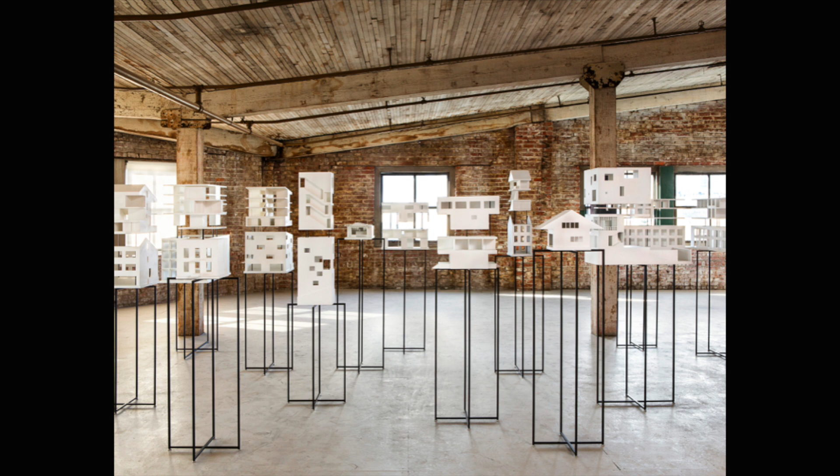Before going to the projects, I'd like to first describe our own process within our studio. To begin with, our approach is experientially driven. With this in mind, we spend a lot of time thinking about the specific characteristics of places that feel the best to be in.

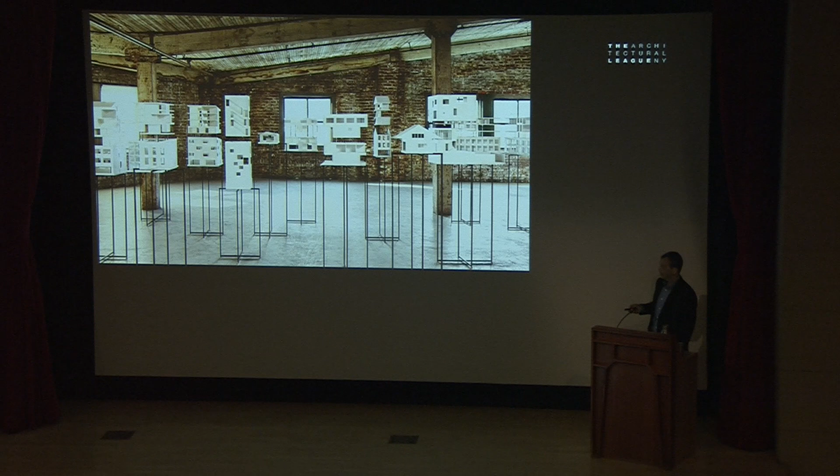As we've done this, we've noticed a lot of themes or characteristics of these types of places, these places that feel the best to be in. But what we've also found is that there's one theme that continually reemerges, and that theme is clarity. So because of that, clarity's become this overarching goal in our work.

Throughout our work, we've tried to achieve a similar sense of clarity, always looking for ways of getting closer to this quality. As we've done this, we've noticed certain techniques and themes that seem to get us closer to these goals.

Simple material palette, for example, or deploying materials strategically in a way that supports the spatial intent, or integrating building systems to the degree where they disappear and all you experience is space and materials. Integrating building systems is still a challenge for us, but one of these days we'll get that completely. Ultimately going in the direction where buildings emerge anatomically with space, materials, and building systems considered equally and interwoven.

This image shows examples of our concept models. We always knew that concepts were important for our practice, but one thing we learned through this process is that there were two ideas in generating a concept that were really important for our most successful projects.

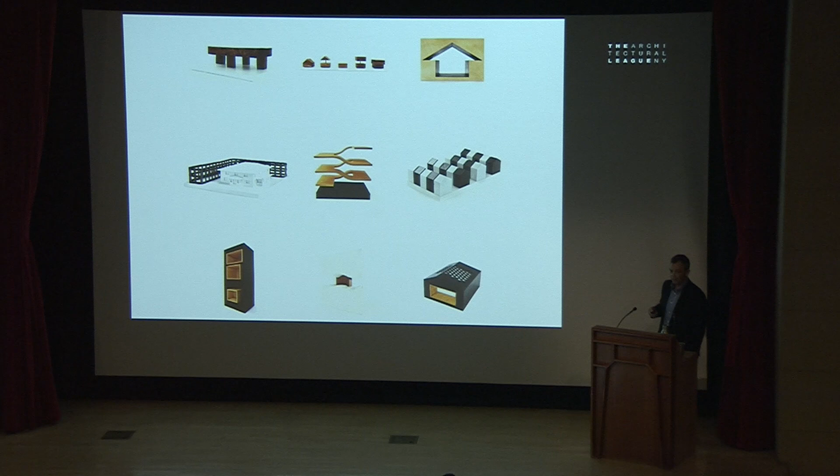Those two things are: one, that the really successful projects, the projects that feel the best to be in, were projects that had a concept that was a singular response responding to all the criteria, or the major criteria, of the project. The other part is that singular response for the best projects really brought an experiential identity to the project. So those two things: the singular response, and then that singular response bringing an experiential identity.

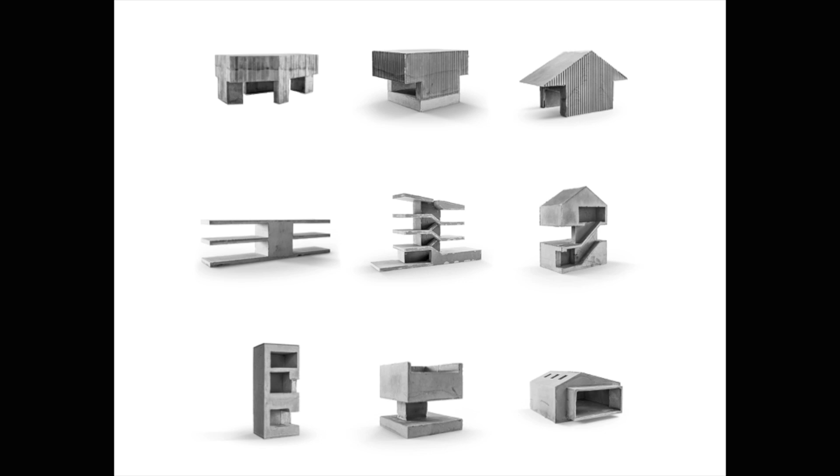These are examples of our models that tested spatial clarity, essentially cast figure-ground models showing the main spaces as voids and the solid spaces as the support spaces or smaller spaces. What we learned after doing these models is that the most successful projects, the projects that felt the best to be in, were ones that brought the secondary space forward, that really used it to define the main spaces in a more robust way.

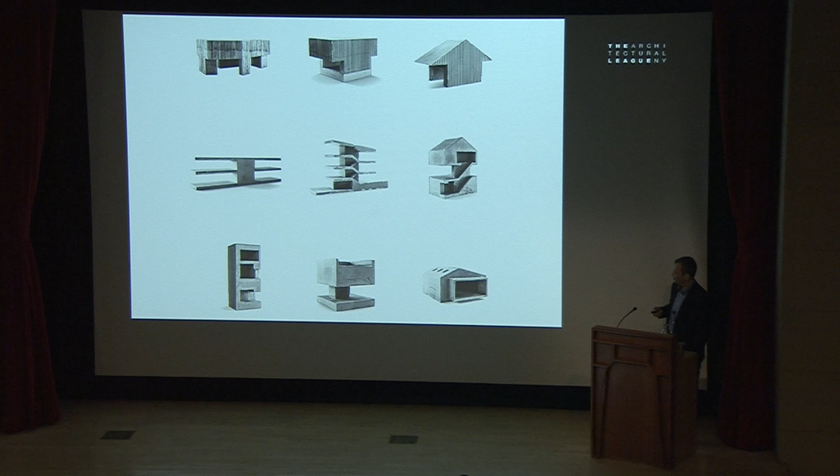We also found that by pulling it forward, it allowed these natural locations for mechanical systems, making that part of the project a lot easier instead of trying to shoehorn it in later. These are examples of our models testing compositional clarity.

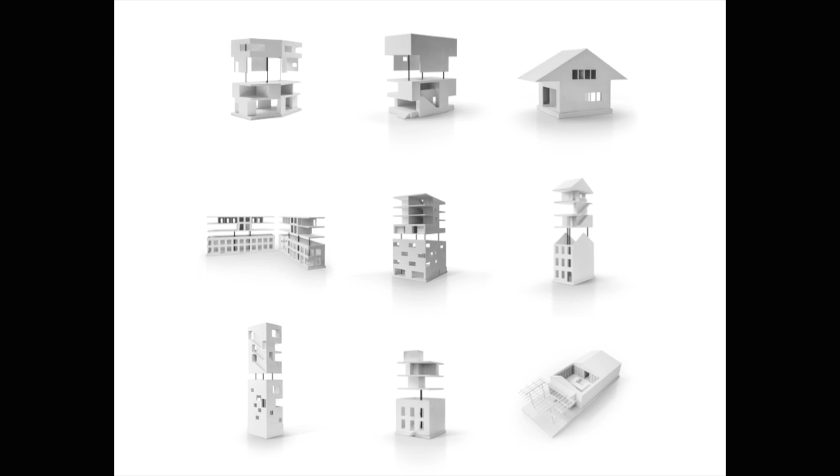These are the most representational models, but they go a step further by pulling apart the outside of the building from the inside of the building. So at one moment you can see the exterior composition of the facade, as well as the internal three-dimensional organization of space and how they relate.

What we learned from these models is that the most successful projects were the ones that really distilled both the outside composition and inside composition down to its minimum, to the point where it was hard to imagine what could be added or what could be taken away.

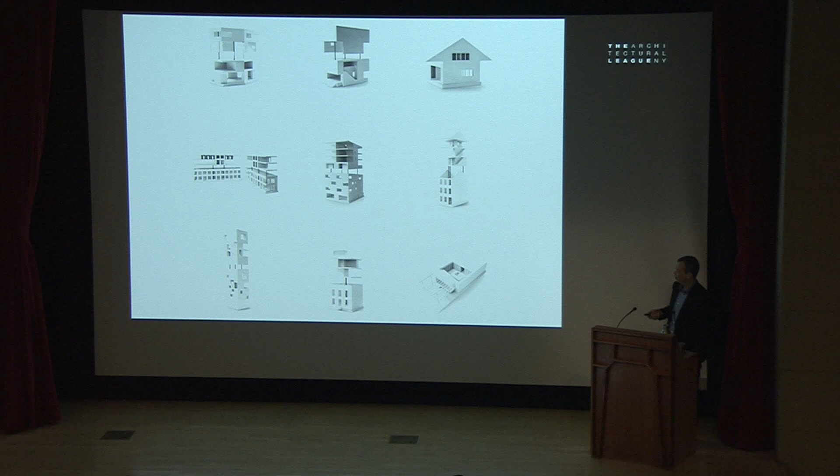With this clarity project in mind, I would like to go through 3 of the past projects that were part of that clarity project. The first one is the Tower House, located in the West Hills of Portland, Oregon.

This is a vicinity plan, and it starts to show some of the constraints of the site. It's a steep site to begin with - you can see the contour lines - but it's also a constricted site. There's a public stair coming up from below the curve of the street, and also a large fir tree, all of which constrict the street-facing property line by more than half.

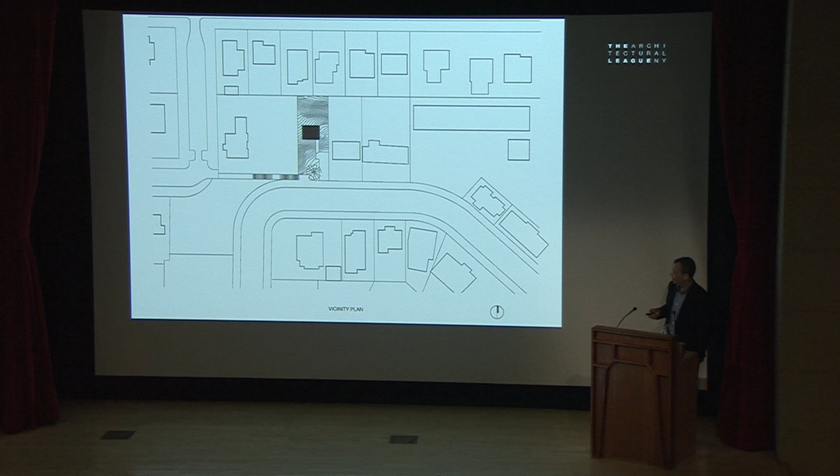So it really was impossible to locate the house adjacent to the other houses on the street. Instead, we ended up placing the house lower down on the site, on an area that was not exactly flat, but the least steep part of the site.

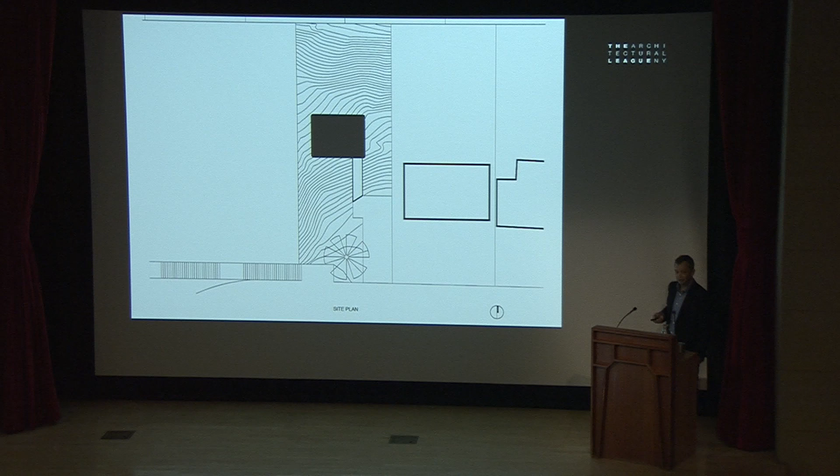We also decided to reduce the amount of site disturbance and expensive retaining walls by using a small footprint and building up rather than out. In this case, a 600 square foot footprint that went up 4 stories.

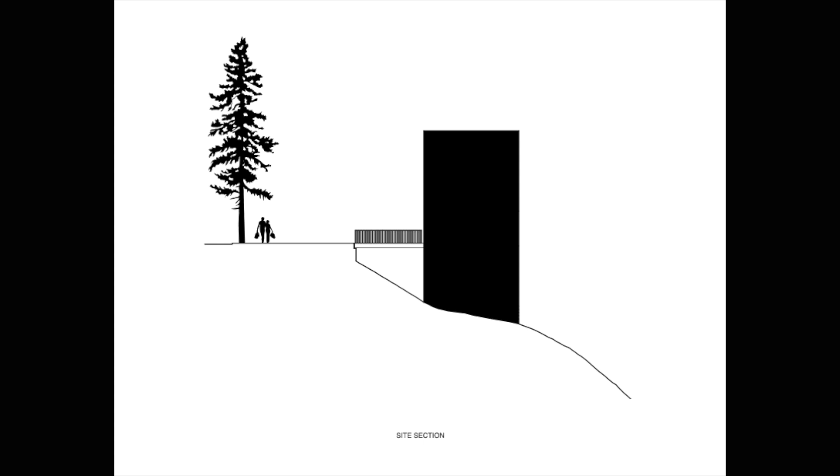This is a diagram going through the site. The street is uphill from the site, and then the profile of the house - essentially a tower house that's connected back to the street elevation with this 25-foot long bridge.

Along with the site constraints, there were also budget constraints. We decided, instead of spending the money equally across the entire house, that we would concentrate it on 3 main rooms and also the enclosure of the building.

In pushing the design forward, we looked back to the Scottish tower house, where there would be 1 main room per floor and then support rooms built into the thickened wall on the edge.

We did a similar thing with this new tower house, placing stairs, bathrooms, closet space and mechanical areas in this thickened perimeter, and then carved it away at each of these main rooms into the loggia that you see there.

The third floor, which is where the bridge connects, is sort of the hub of the house, with the kitchen and dining room. Finally, the top floor is the living room and roof.

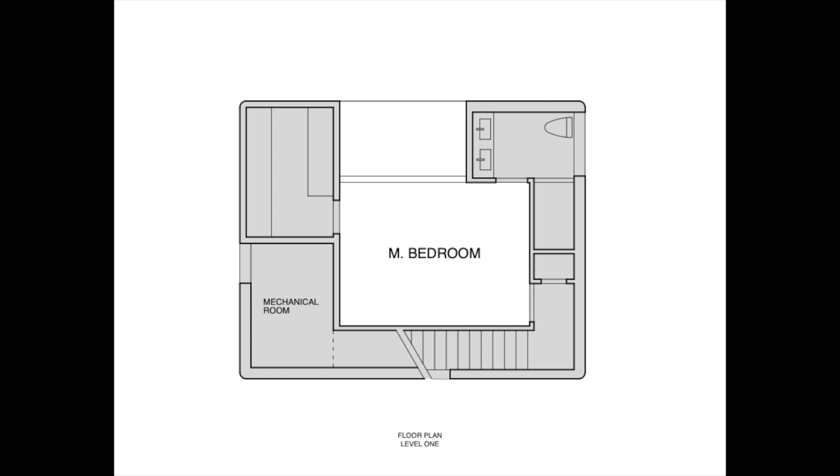The lower floor plan, third floor with the dining room, and the living room.

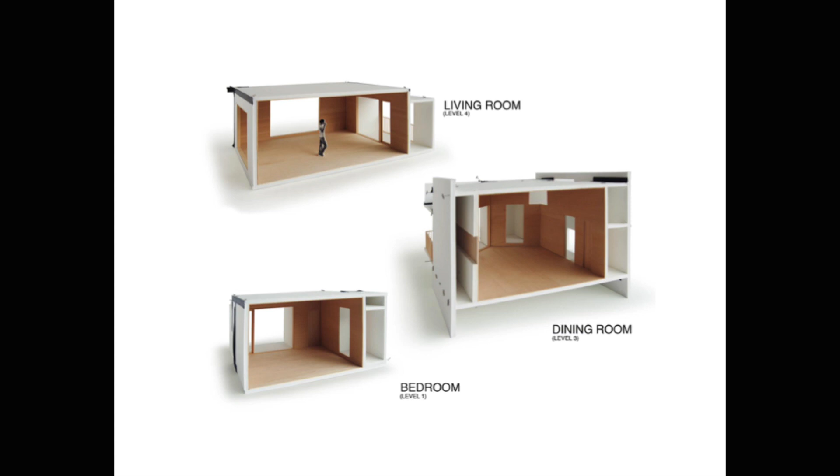And then 3 study models made for the 3 rooms. We made them large enough to be able to take a photograph inside.

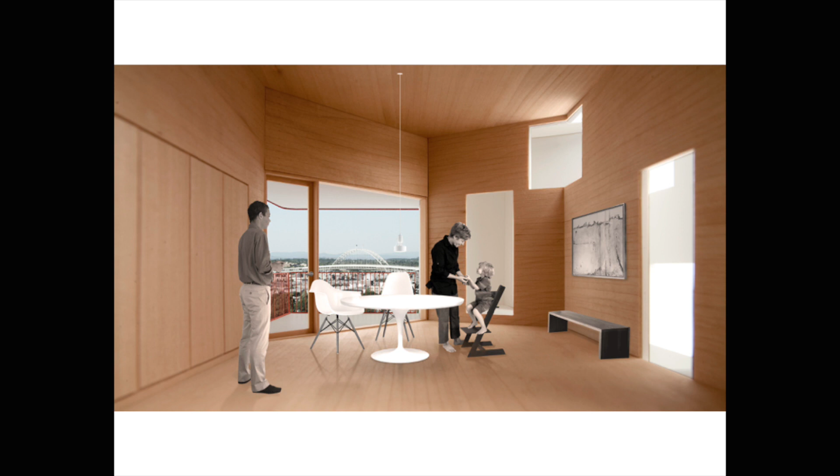We added entourage and then the views, and then a similar model for upstairs with the living room.

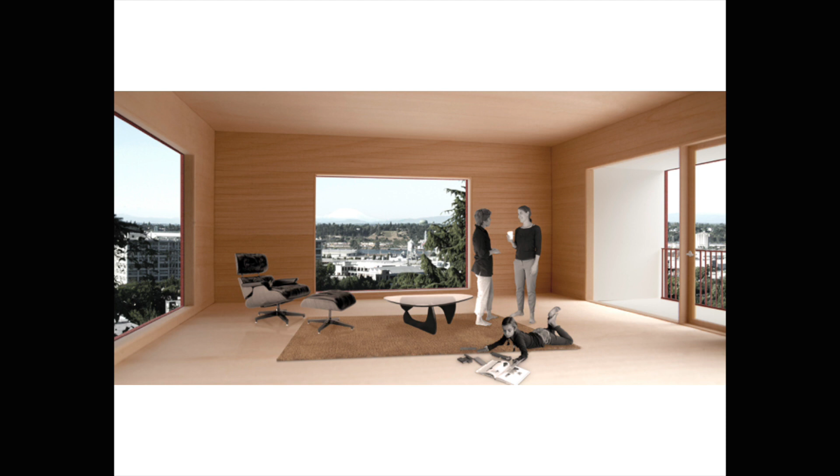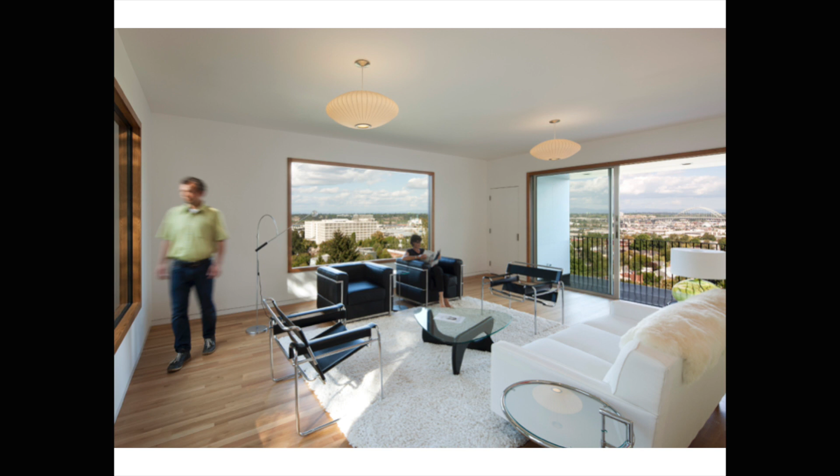And this is the top floor, the living room, with framed views in 3 directions - 2 towards the city, and another one back towards the forest or the hill - and the master bedroom.

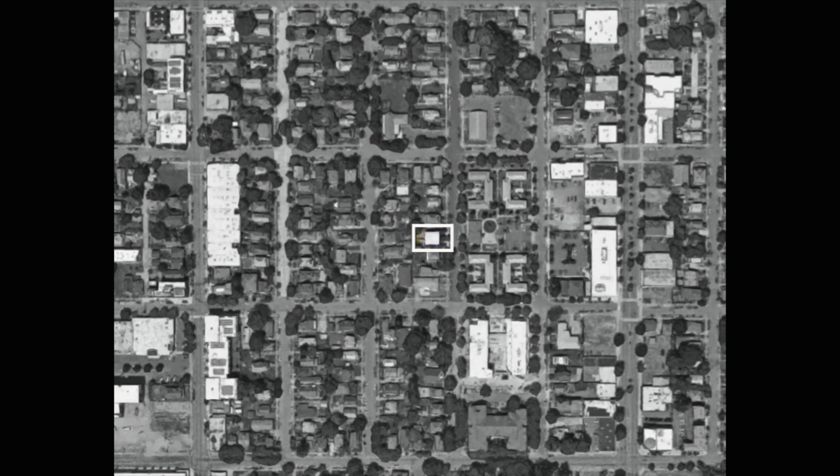Okay, the second project is the Z-Haus. The Z-Haus is located in Northeast Portland, in a neighborhood primarily made up of single-family detached houses, but it's also a neighborhood where the city is encouraging higher density infill.

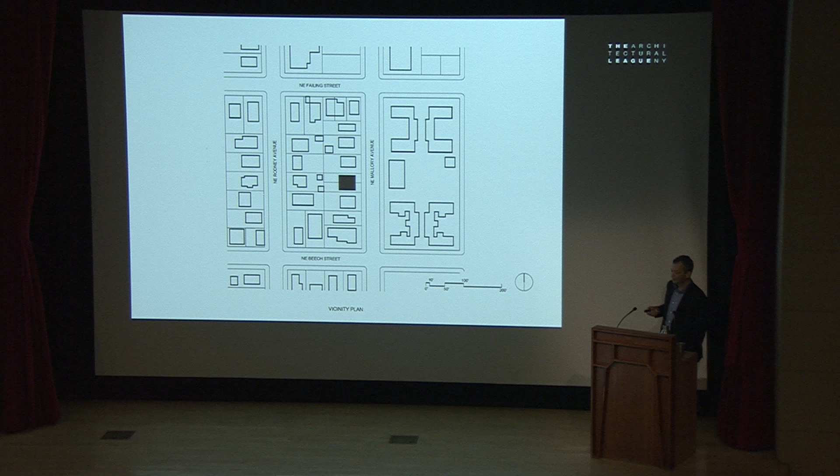In this case, what's regulated is 2 dwellings per what typically would be a single dwelling lot size. So the first challenge of the project was figuring out how to add a full-size house to a half-size lot without overwhelming the lot.

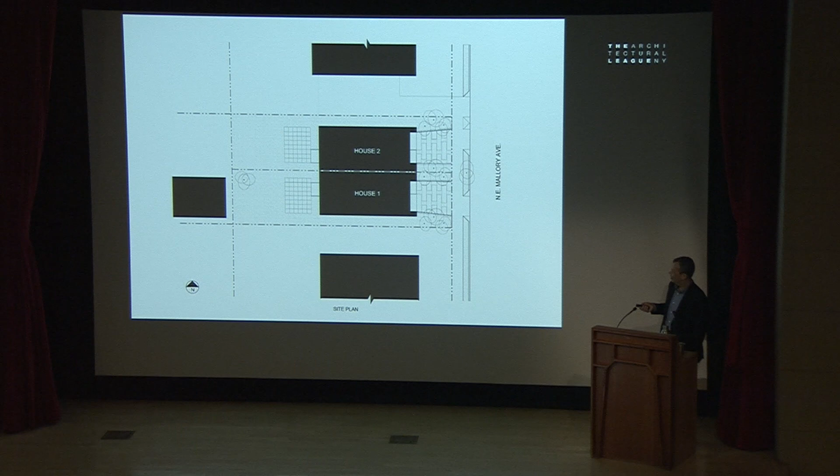And also being able to tie into the adjacent neighboring houses. So the first step was simply to attach the houses and then align the front and the back of the house as a means to stitch together the streetscape and the backyardscape. But this meant, in order to get a full-size house, that it had to be tall.

The second challenge or idea for the house was that we wanted to make a house that wasn't pancake, that wasn't separated from one floor to the next. So we came up with the idea of using a split level, and ultimately ended up with a scheme that was basically 6 rooms each offset by a half level, so from any one room you could always view a half level up or a half level down.

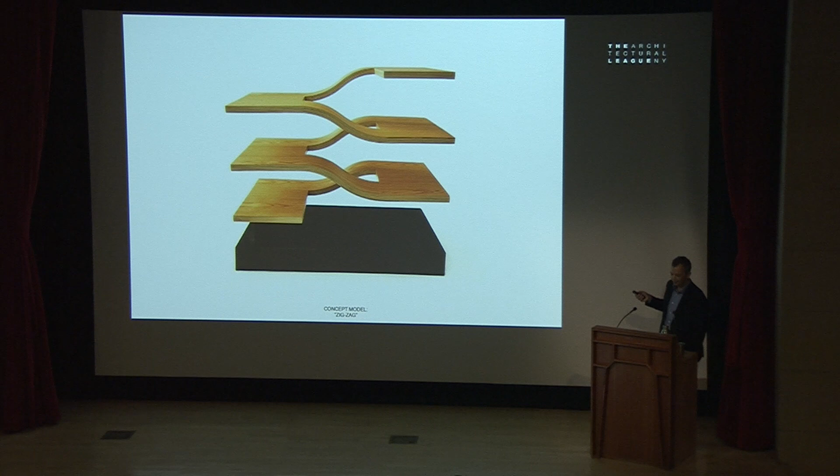This became our concept model for that house, which we called the zigzag house, and then it became the Z-Haus. This was definitely the most difficult concept model for us to build.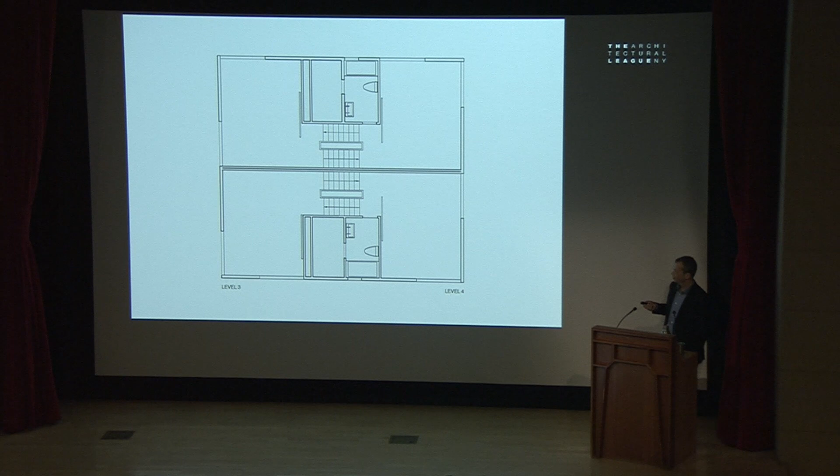And then the top level, and the composition model showing the 2 units attached in the middle. And then the facade — the idea with the facade was really to make it not look like 2 attached houses, so we used an offset grid to blur the line between a single house and 2 houses.

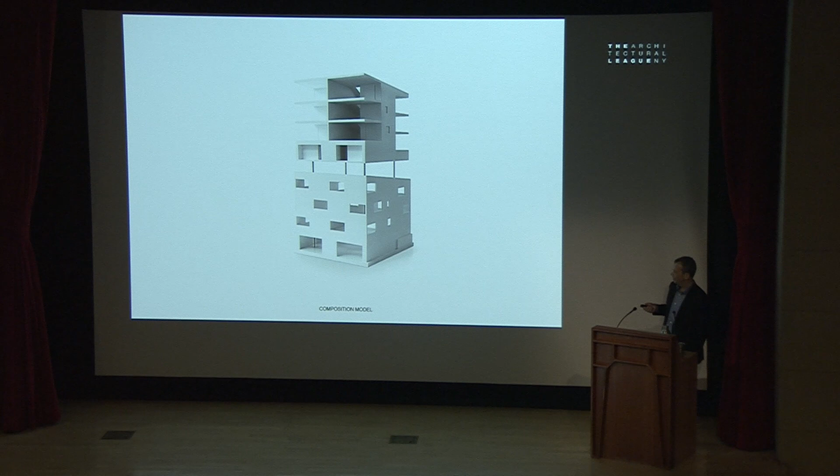The next project is Milwaukie Way. Milwaukie Way is an office and retail building, a two-story building located in southeast Portland on a commercial spine.

The building is a bit odd on the street compared to other buildings, and the owners came to us wanting to add 2 to 3 times the amount of leasable square footage to the project. This became the starting point of the design — how to add that much square footage without overwhelming the existing building, and also how to add that much retail space with a limited amount of street frontage. This building is placed pretty much at the center of this 100 by 100 corner lot, so we had little street frontage to work with.

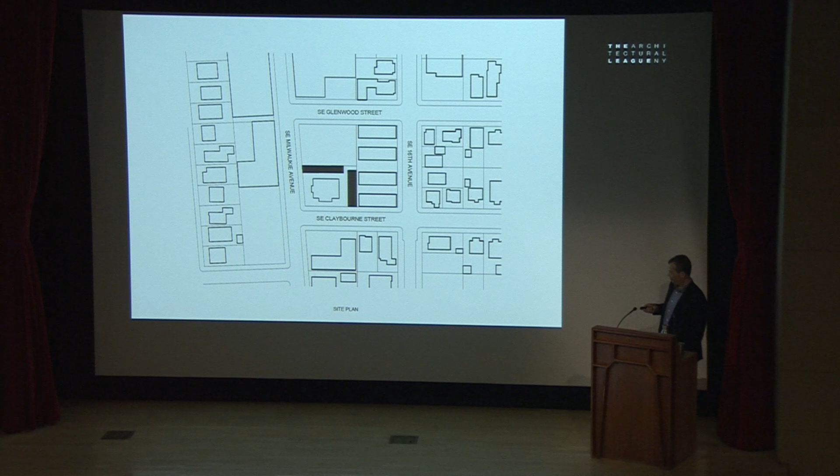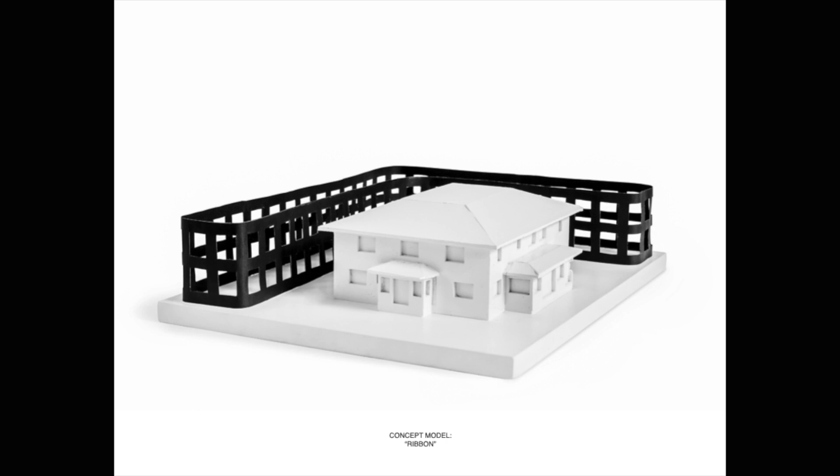So the first part of the design was to bring the street into the site through the use of a pedestrian alleyway. You can see the two black footprints being the new buildings. The new alleyway added about 150 feet of additional store frontage, which was great. It also created a buffer between the existing building and the new building, and that was working really well.

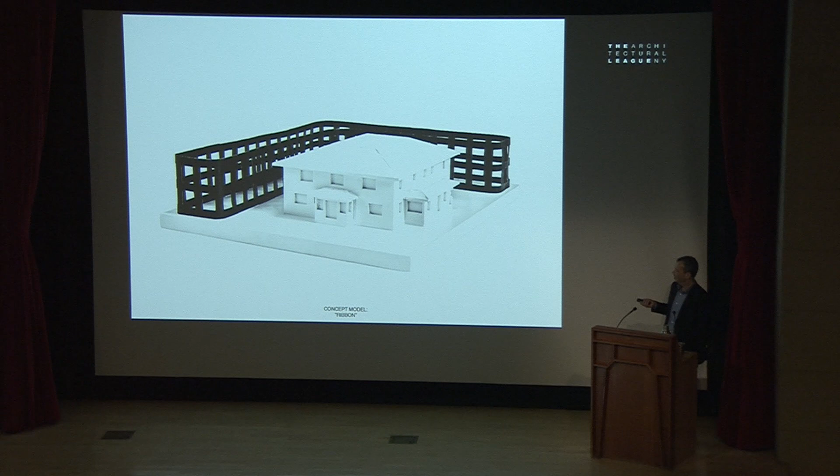We finally developed a scheme in a way that created a quiet backdrop for the existing building. So we envisioned the building as a continuous grid of 6-foot openings, and before we figured out exactly what it would be, we envisioned it as this ribbon of 6-foot wide openings that would be a quiet backdrop for the more ornate existing building.

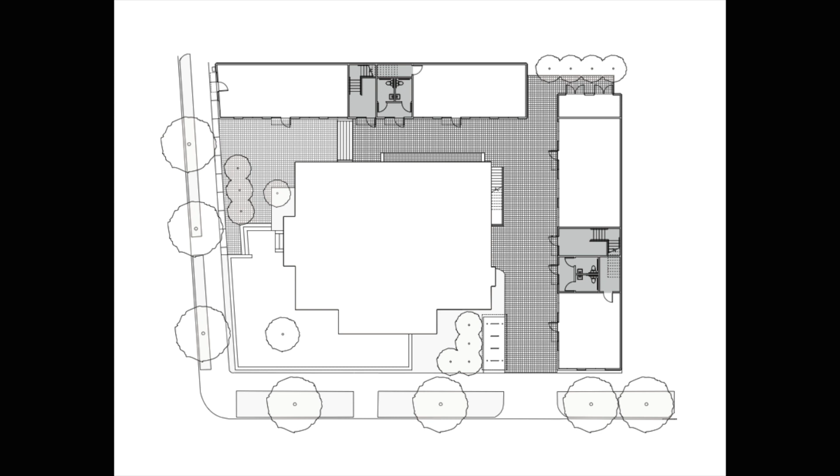Okay, so now to the current projects. We've tried to use the similar idea of clarity, and we're exploring it in different ways. I think in the spirit of time management here, I'll concentrate on the idea of each project, and then go through the rest fairly quickly.

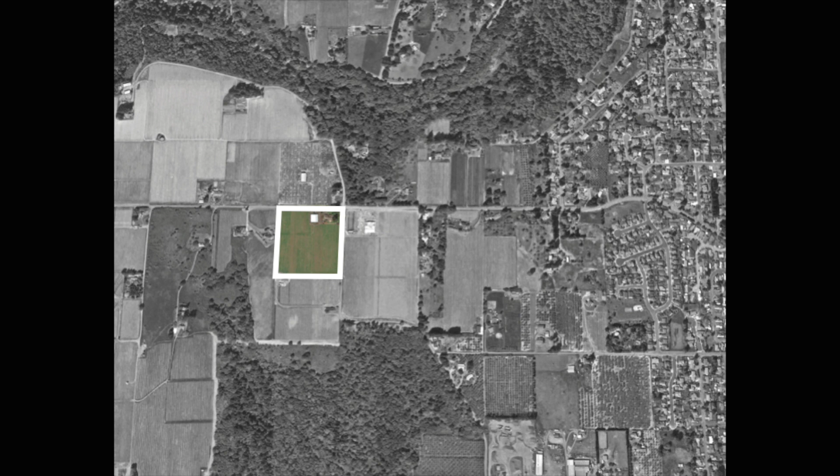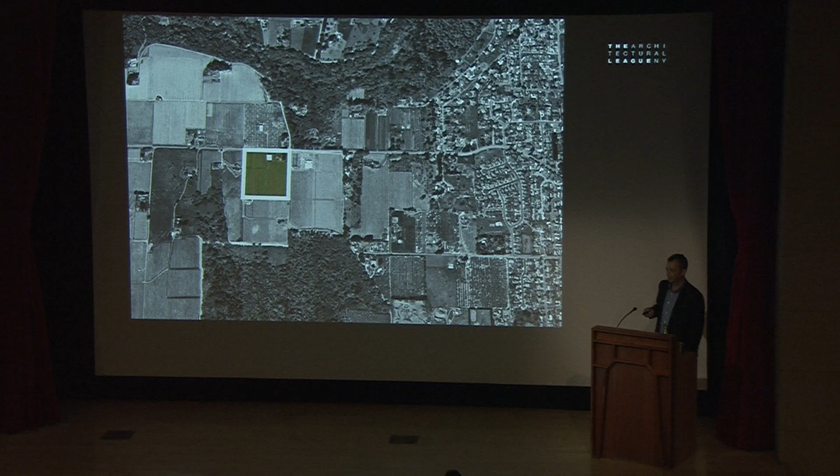There were a couple of big constraints that were design drivers of the project. One was that this was the only location we could do the new buildings on. So unlike other wineries that tend to separate production from hospitality, we had to do a building where they could coexist together. That was one challenge. The other challenge was that it wasn't possible to relocate this winery during construction, so we couldn't simply demolish this building and start from scratch. We had to figure out a way to renovate around it.

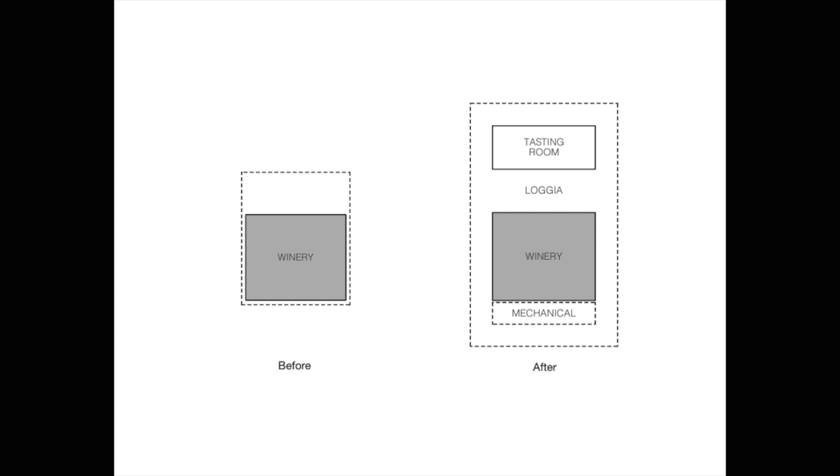On the left, you can see what used to be the existing winery, shown in gray, with the roof overhang towards the vineyard that was the crush pad. On the right is our strategy for organizing the spaces. We placed the tasting room towards the vineyard, and between the tasting room and the winery we placed what we call a loggia. The loggia becomes public space for most of the year, but for the 2 weeks of harvest in the fall, it becomes the crush pad.

And then we placed mechanical towards the street, which is, of course, the worst place to put mechanical, but was the only place to put it. So we have a strategy for that too. And then tying everything together is this large roof form that you see dashed in.

This shows the anatomy of the building. There's the large roof structure. It's an interesting roof, a 6-inch tall corrugated steel roof. The last 4 feet of the roof cantilevers on its own, so no gutters and no substructure.

Below that, the existing winery and new components of the winery are clad with a charred cedar siding, a board and batten cedar siding on opaque walls. And I mentioned that mechanical area in the front - it becomes a 2x2 cedar screen wall on the street side, hiding the mechanical area.

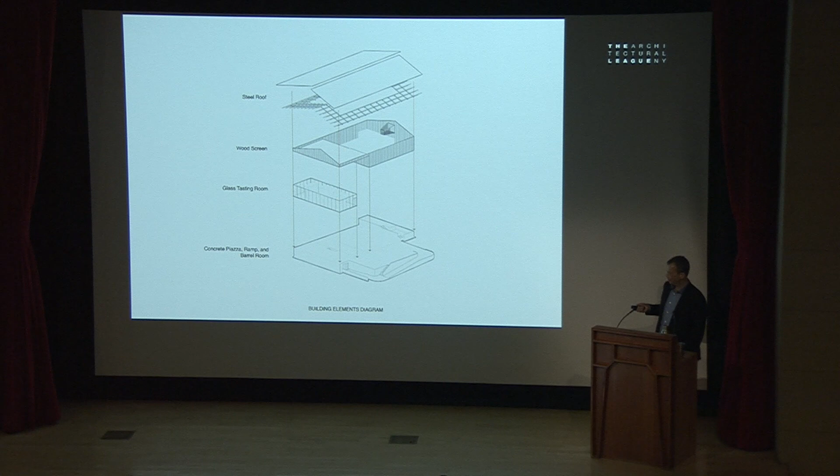A plan of those components. A closer up plan of the tasting room. So the tasting room is completely surrounded with this 14-foot tall curtain wall system, and then support spaces are pulled into the middle, creating or subdividing that larger room into smaller rooms.

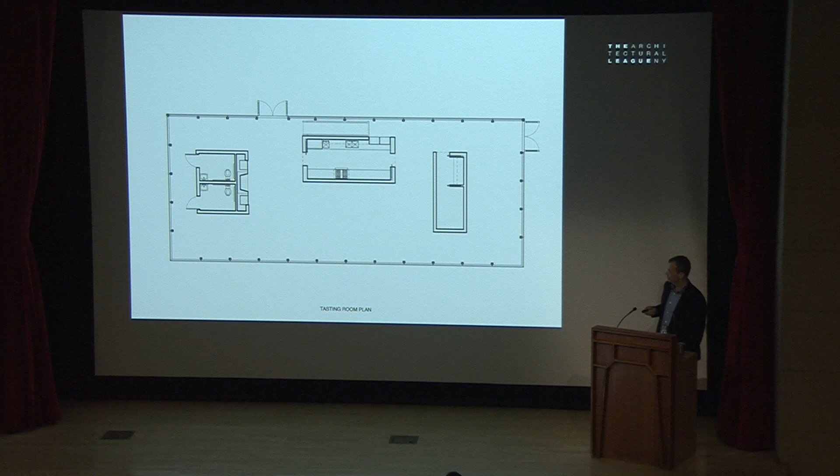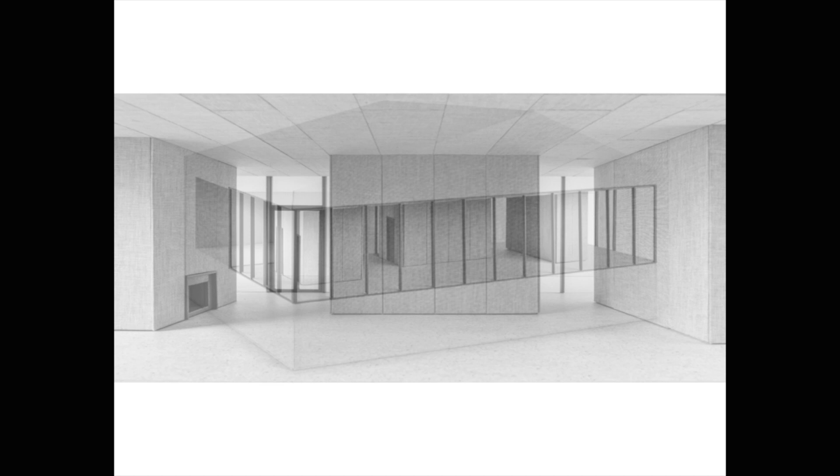We did a model of the tasting room, and similar to the tower house, we made it big enough to photograph inside, and we represented materials on the wall. In this case, the walls and ceiling are clad with an acoustical panel that's fabric wrapped, and then a ground concrete floor.

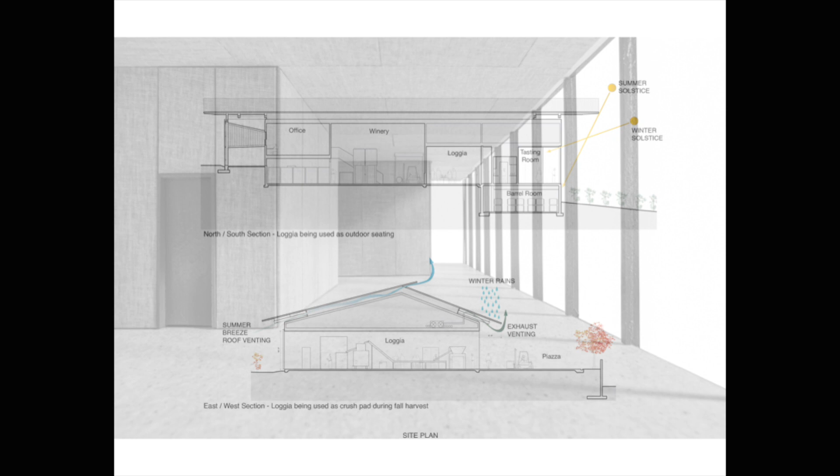In a couple of sections - one thing to note is that because we like to hide ventilation in general, and in this case it was particularly hard to have vents in the roof because of the tall corrugation, we placed all of the ventilation in this interstitial space between the body of the building and the roof. So the roof floats above the building for about 10 feet on the perimeter.

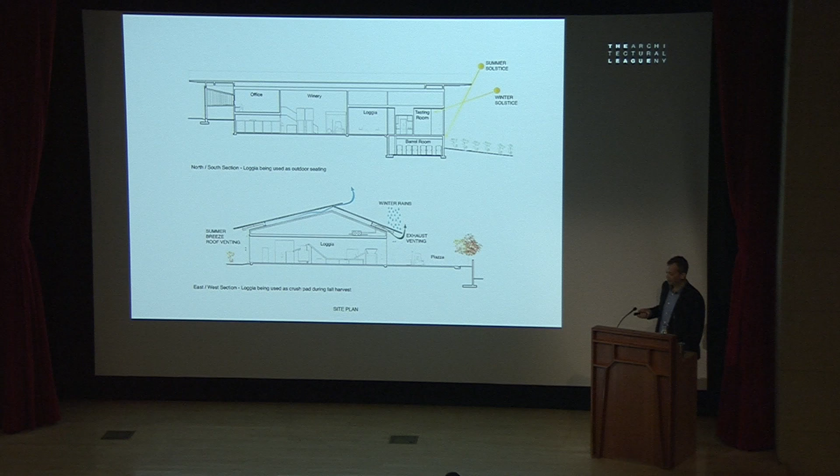This shows the loggia that's used for public space during most of the year, and then for harvest it's used as a crush pad. Standing inside that loggia.

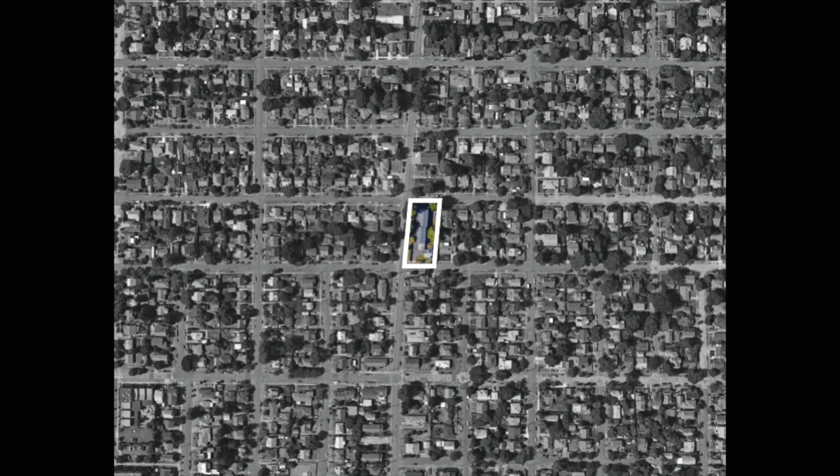The next project is Origami. Origami is back in Portland, in Northeast Portland. It's in a neighborhood not that different from the Z-Haus, made up mainly of single-family detached houses, but also one of these neighborhoods where the city is encouraging higher density infill. In this case, more density - it's 3 dwelling units per what would typically be a single dwelling lot.

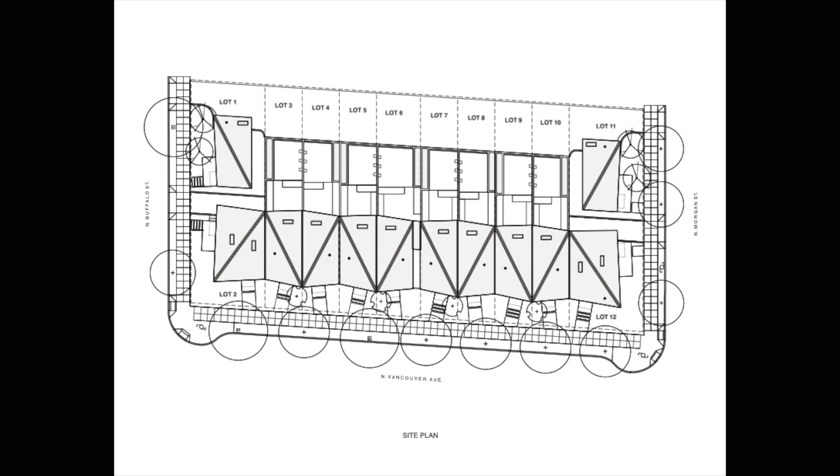This is a site plan, so it's 12 attached fee simple row houses that take up half of a Portland city block. So this was really the first challenge: how to take this large for its neighborhood building and fit in with the scale of the single family houses.

The other challenge was budget. It had a fairly modest budget. In this case, it meant using Hardie lap siding and composition shingles, so we couldn't rely on the materials to create shadow relief and texture.

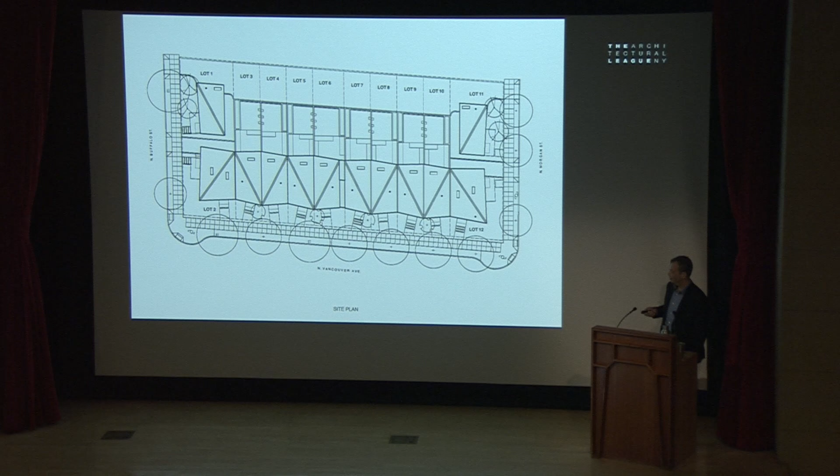So it was really trying to find a way for the form of the building to give shadow relief and texture, but also to modulate it in a way that would fit into the neighboring houses. And we tried a bunch of different strategies until we finally...

tried a strategy of folding the roof and folding the walls in such a way that it ended up looking like origami. It wasn't our original intention of having an origami building, but it looked like origami, and we liked how it looked. So even though it's a goofy name, we decided to keep it, well, the name stuck. So it's the Origami project.

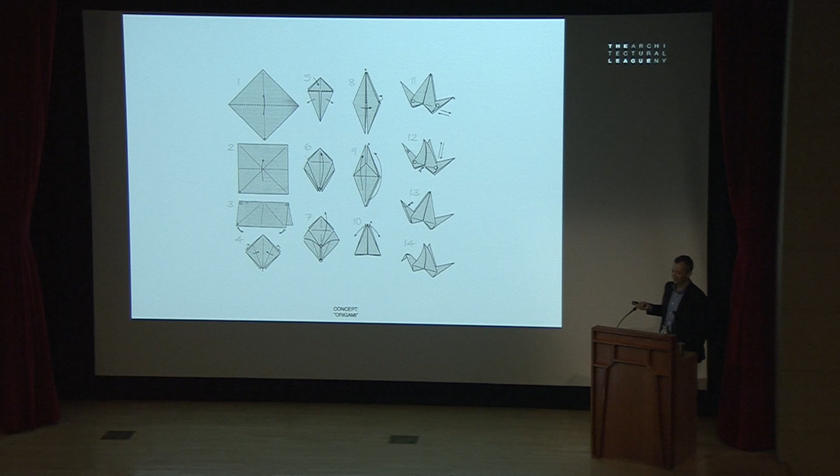This is a model of one of the units. There are 3 types of units. This one is the most prevalent unit, we call it the courtyard unit. It has courtyards on the back side. The living is on the ground level, there's 2 bedrooms on the middle level, and then a master suite on the upper level.

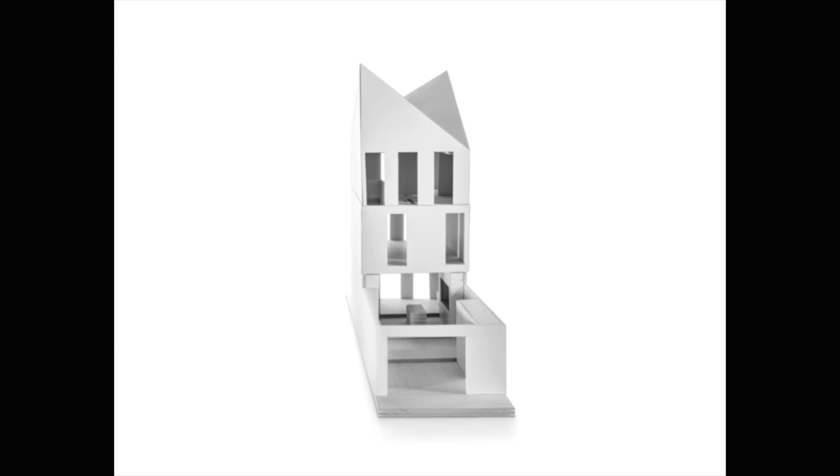The floor plan of it. Images, renderings, and a construction photo.

So it's getting close, it'll be complete next month. Detail photo. And then the courtyards in the back are built out of ground concrete block wall. So there's a drive aisle in the back, there's a parking area, and then also a courtyard.

Okay, the last project is the Society Hotel in Bingen, Washington. Bingen, Washington is located about an hour east of Portland in the historic Columbia River Gorge. It's a small town, Bingen is a small town.

And the site is near the water, but it's also separated from the water by various industrial companies and then also the railroad.

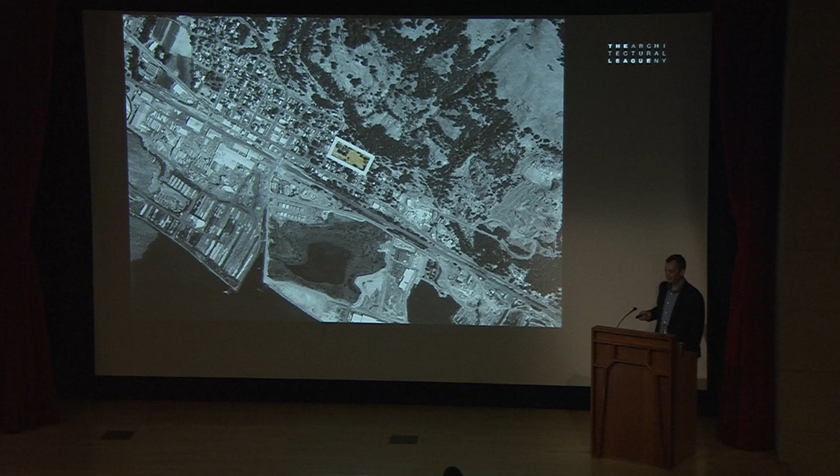This is a site plan. The property was originally an elementary school built for Bingen in the 1930s. The buildings on the left are the original school building, so half of the project was adaptive reuse, and the other half was new construction, and I'll show you images of the new construction project.

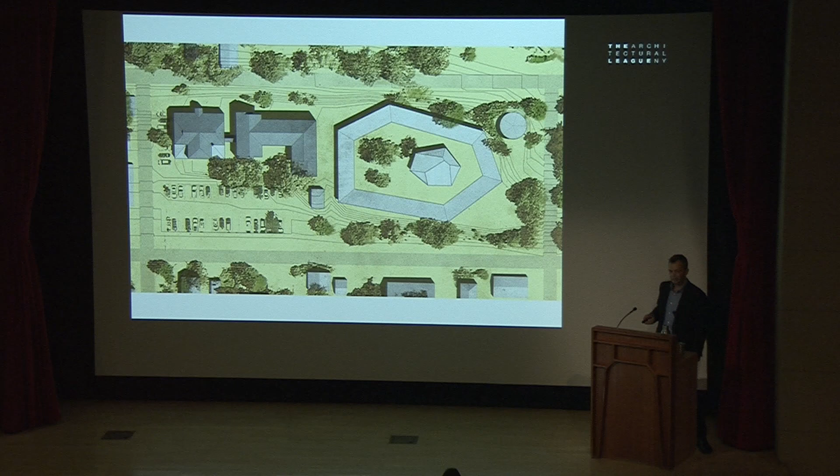The new construction is basically two parts. One is 20 detached cabins that are all connected by a singular roof form, which is what you see, the ring. Within that ring is a spa building that has soaking pools and a sauna and that type of thing.

This is a plan showing how the cabins are detached. And then our idea for the project was really how to connect the hotel to the larger landscape while mitigating the industrial parts of the site.

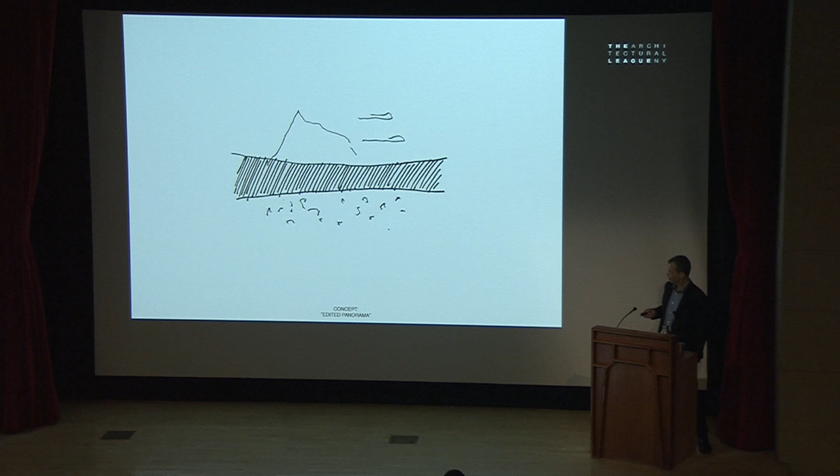So essentially using the massing of the building to edit out that middle ground, connecting the foreground of the hotel to the background of the Columbia River Gorge.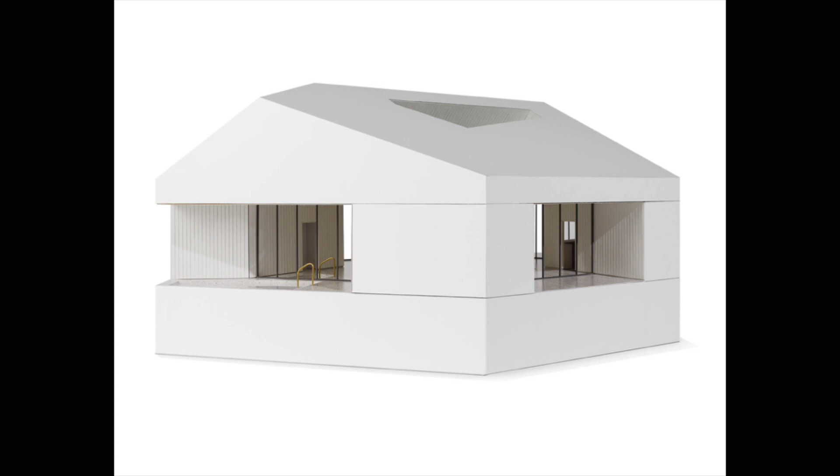We used another physical model to test the materials and spatial qualities of the spa building, like we did with the winery tasting room. They keep getting more and more work goes into each of these models. But this one, we represent the materials, but also accessories like the handrail, and in this case, place the person inside of the photograph instead of photomontaging it later.

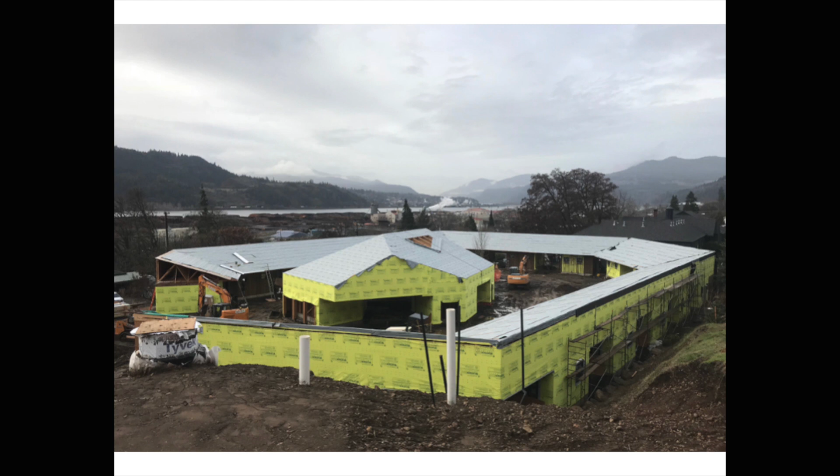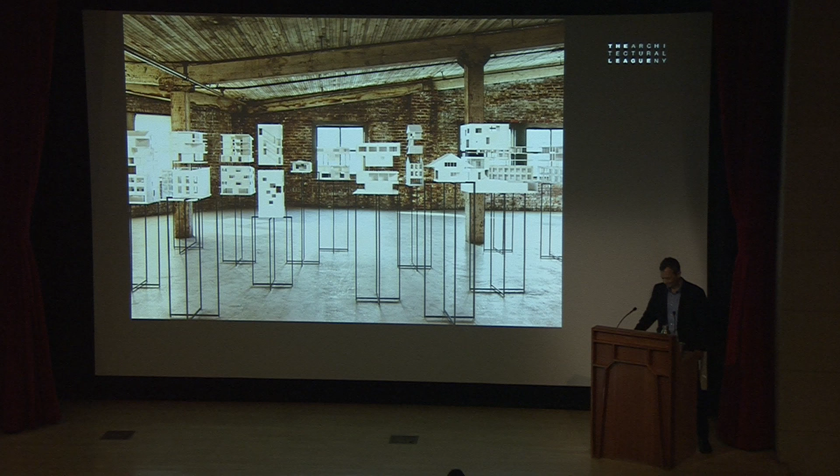Do I need to do anything?